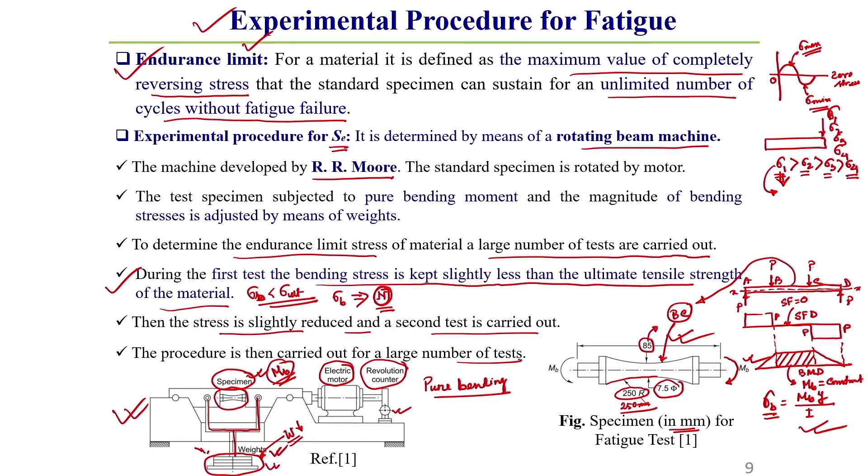That is why here I have written: then the stress is slightly reduced and a second test is carried out. The procedure is then carried out for a large number of tests. Like, let us consider corresponding to sigma 1 you get n1 number of cycles, for sigma 2 bending stress, n2 number of cycles, and this way for sigma n, n number of cycles.

This stress versus number of cycles we need to plot on a log curve. Here you see this curve; I am showing this log curve. What does it mean?

So, you can see these things very nicely, a little bit I am just showing here. So, this horizontal axis represents log 10 base number of cycles versus, this is generally you can say, log SF. What is SF? SF means fatigue stress, that means fatigue failure stress.

Now, if you just plot these things you will get some points, because if the initial stress is high, its number of cycles will be less. Then we reduce that stress value and get the second point. This is the first point, second point, third point, fourth point, fifth point. After a number of tests you will observe that after reducing the stress value, it is not failing due to fatigue, or it reaches an unlimited number of cycles.

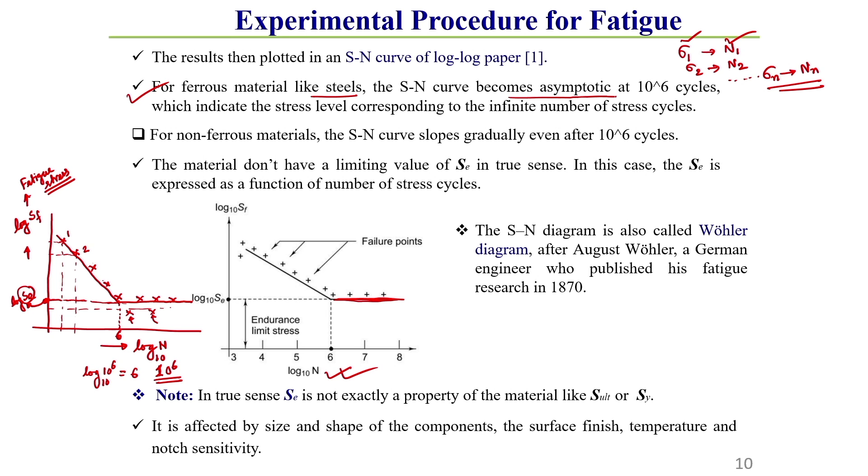That is why I have written here, for ferrous material like steel, the SN curve becomes asymptotic at 10 to the power 6 cycles, which indicates the stress level corresponding to an infinite number of stress cycles. Understand? So, at 10 to the power 6 cycles, whatever the stress is there, it can sustain an unlimited number of cycles. If you further reduce the stress level, your number of cycles becomes unlimited.

So, this is for steel material, whereas there are other materials like aluminum. For aluminum material, the SN curve, log fatigue stress versus number of cycles, this is your 10 to the power 6 cycles. After 10 to the power 6 cycles it is still declining in nature.

That is why here I have written, for non-ferrous material like aluminum, it is observed that the SN curve slopes gradually even after 10 to the power 6 cycles. So, the material does not have a limiting value of SE in the true sense. In this case, SE is expressed as a function of number of cycles. Some non-ferrous materials, some aluminum alloys or pure aluminum, have endurance strength as a function of number of cycles. Here the line is not becoming asymptotic or horizontal, it is further declining.

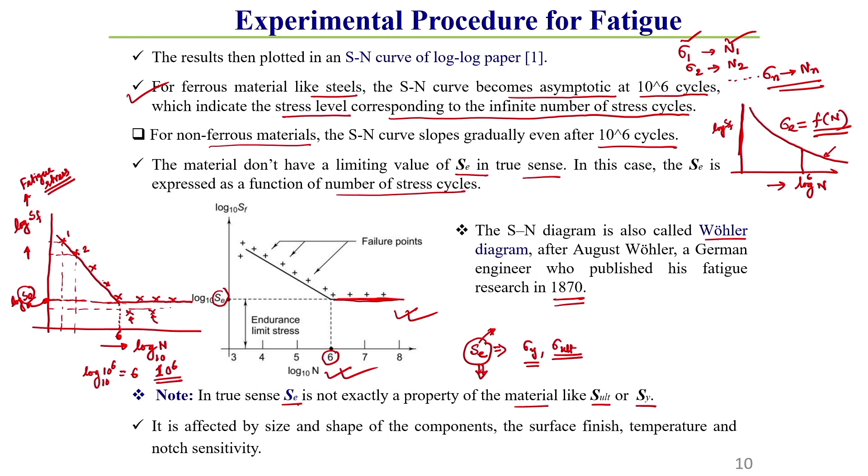But this endurance strength is not a constant property of that material, because it depends on different factors. It depends on surface quality of the component, temperature, and environmental condition. As it varies with different factors, it is not a constant property like yield stress or ultimate strength. That is why here I have written, in the true sense SE is not exactly a property of materials like ultimate strength or yield strength, because it is affected by different factors which I have written here. Okay.

Now, here we need to know that whatever specimen we generally use for this R.R. Moore test should have a very good standard surface quality and standard dimensions. The dimension details I have already explained. Then what should be its surface quality? Its surface should be very finely polished, and generally the final polishing is done in the axial direction in order to avoid circumferential scratches.

What I am telling, understand? That means, due to machining, there can be some circumferential scratches. So the final polishing of this R.R. Moore or rotating beam specimen is generally done axially. If we polish in the axial direction, then these circumferential scratches will vanish. This type of very high quality polishing is required.

And how this specimen is subjected to bending stress, I am going to discuss a little bit here. Let us consider the cross section of this specimen. Let this be the R.R. Moore specimen. It is subjected to pure bending. In pure bending, along the cross section, the bending stress is M y divided by I. Let the y axis be this.

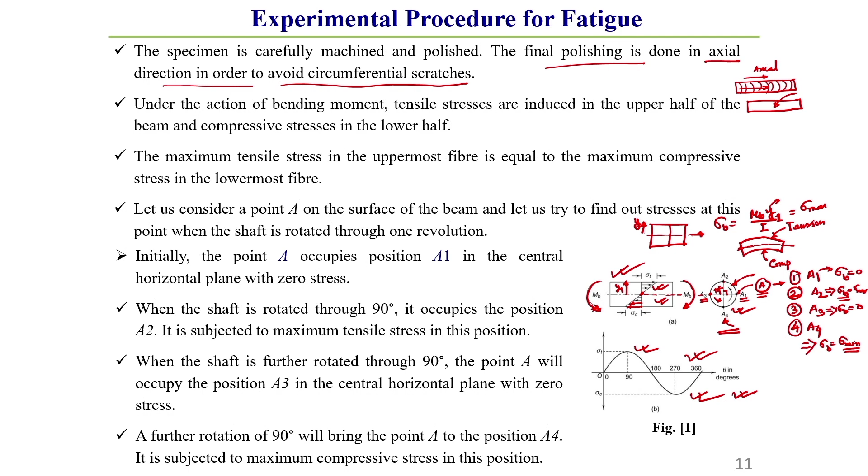This load is generally for one revolution. So, if it is subjected to n revolutions, then n number of times this type of loading pattern is there for a particular point. This you should keep in mind. There are some other experimental processes we can use for determining the SN curve. This is another equipment, its name is Haigh electromagnetic tester. By this magnetic tester also we can find out the SN curve.

Here also the testing material is generally subjected to fluctuating types of loading, and here there is a magnetic type of tester. With this magnetic tester there is a chuck, and this chuck is subjected to some rotation. Due to this rotation it is subjected to some fluctuating types of loading and number of cycles. So, this is the example of another setup for determining the SN curve.

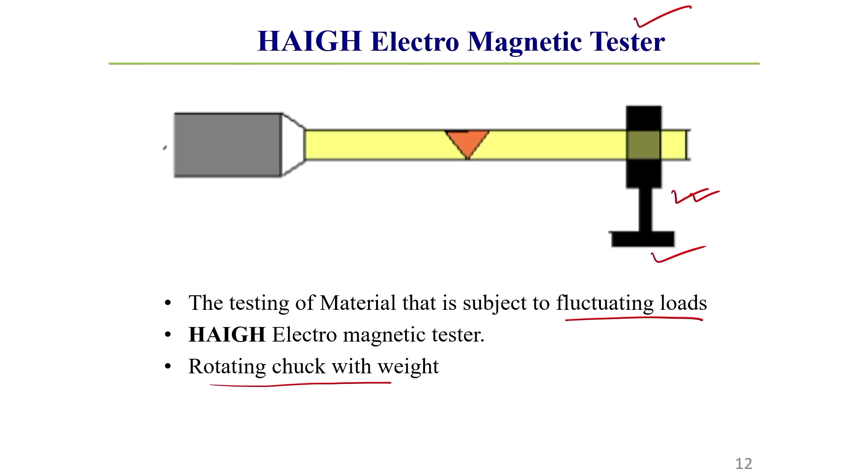Now, we got the idea about the SN curve. Now, we will discuss how from this SN curve we can distinguish different categories of fatigue. Depending upon the number of cycles, fatigue is grouped into 3 different categories. One category is called low cycle fatigue, another is called high cycle fatigue, and another is called infinite cycle fatigue. So, how it looks, I am just showing.

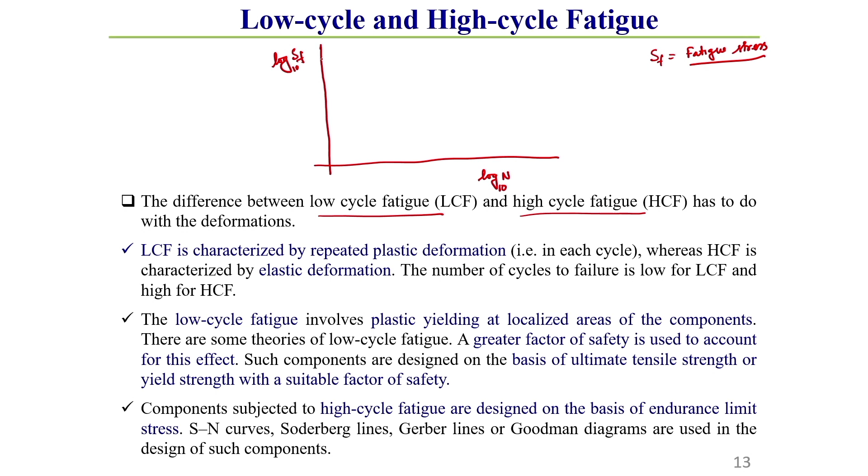So, this is log N, and let this be our log SF. Why is it called log SF? Because SF is called fatigue stress. If the magnitude of fatigue stress is high, then to fail that specimen it will take less number of cycles. Okay. That is why, if we just draw this SN curve here, then it will be very clear to you.

So, here this point represents log sigma ultimate, and this point represents yield strength. If it is ultimate stress, at that time the specimen will take 0 number of cycles. So, that is why here I have written 0. From here to here this is 3, as it is a log curve. After that here it is 6, and the number of cycles is increasing.

Now, from here to here, that means up to 1000 cycles or 10 to the power 3 cycles, this zone is called the low cycle fatigue zone, LCF. LCF means low cycle fatigue. So, at low cycle fatigue the number of cycles varies up to 10 to the power 3 cycles, that means 1000 cycles. In this zone the stress level varies from ultimate stress to yield stress. So, what type of strain will be here? The strain will be plastic type of strain. That is why it is called plastic region.

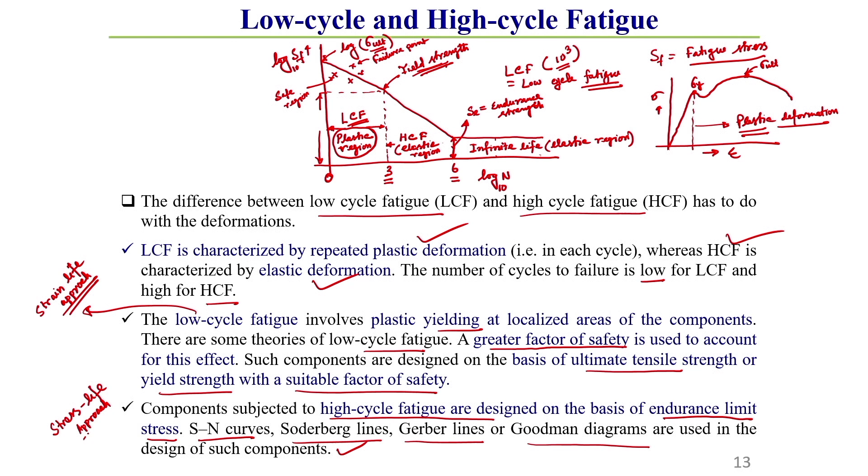And in high cycle fatigue we generally use the stress life approach. So, the strain life approach and stress life approach we will discuss in detail. Now, in the next slide I am going to show some examples of where low cycle and high cycle fatigue take place. Generally failure of a stud on a truck wheel, failure in a set screw for locating gears on a shaft, or failures of short-lived devices such as missiles. These are some examples related to low cycle fatigue, where the strain based approach is used for fatigue life prediction of these types of component.

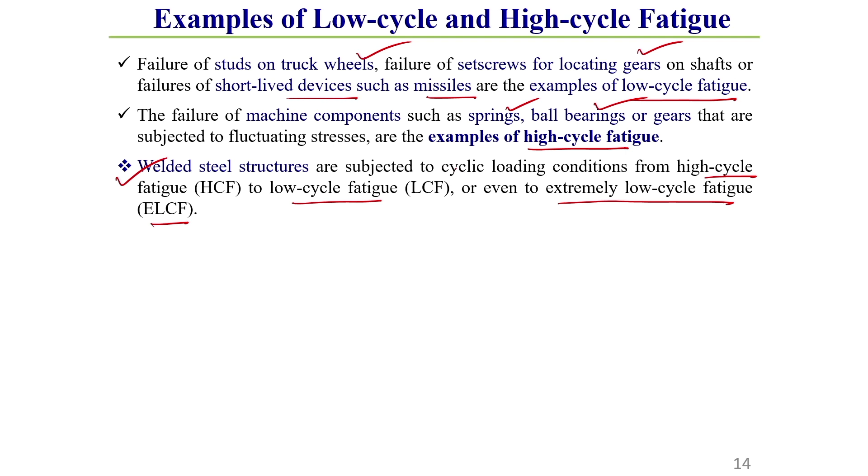Apart from these types of component, the welded joint is also a very important component. Generally welded steel structures are subjected to cyclic loading varying from high cycle fatigue to low cycle fatigue, even extremely low cycle fatigue. A welded joint can be subjected to high cycle fatigue or low cycle fatigue, and some welded joints can be subjected to extremely low cycle fatigue also. Some examples of high cycle fatigue I am showing here: the failure of machine components such as springs, ball bearings or gears that are subjected to fluctuating stresses.

So, this is all about today's lecture. Next lecture I will start from this.